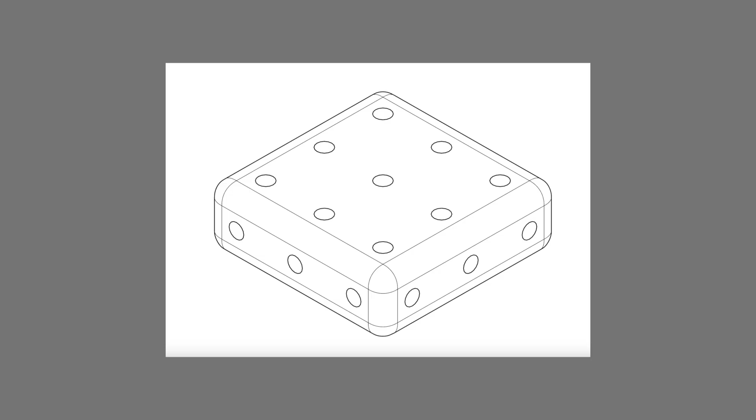The Tinker Block has 9 holes that go all the way through, with 12 holes around the perimeter, only a half inch deep. Once we get logged in, we then will see something like this.

The Create button has a drop-down. Click on the Create button and then select Document. The document dialog then appears.

We enter into the dialog the name of our project, which is Tinker Block 3x3. Click Create and the work area appears.

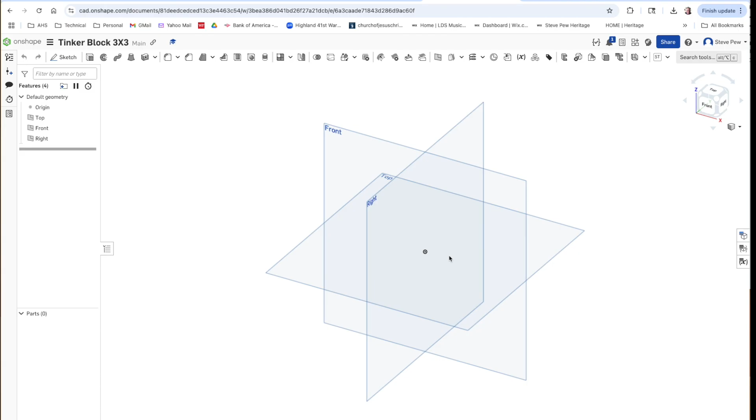Since the top plane is the only one we will be working on, we can hide both the right and the front planes. To view our work area in a straight-on view, we use the right-click menu and select View Normal To. Then we start our sketch.

Click on the top plane to select it, and then we add a rectangle as the first step in creating our Tinker Block. The rectangle we're going to select is the center point rectangle.

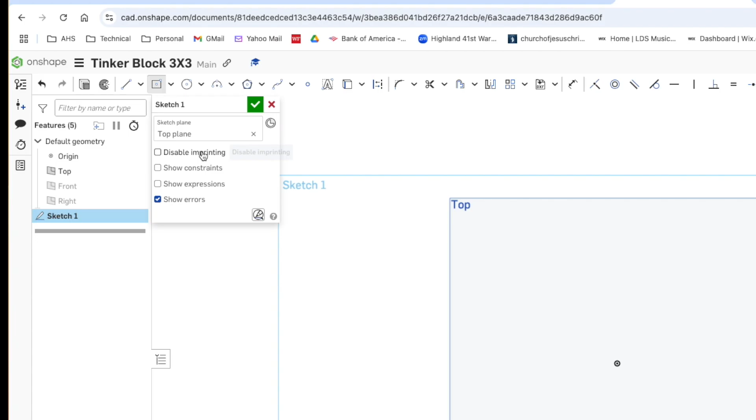We go to the center of the plane and pull a rectangle. What size does this rectangle need to be? Well, from the diagram, it appears that it needs to be 3 inches by 3 inches.

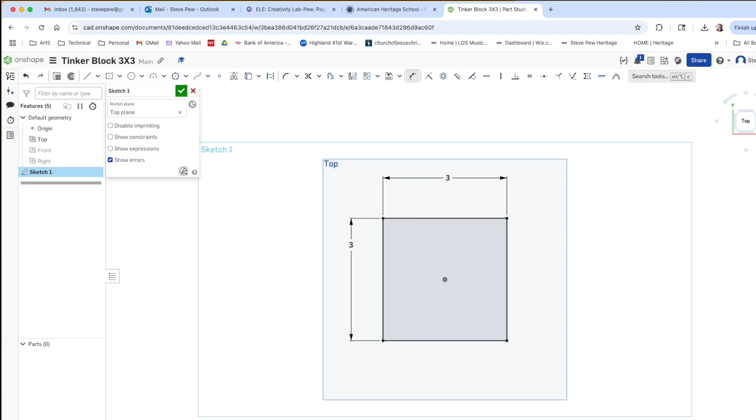So we'll select the Dimension tool, click on the side, drag outward, and then enter 3. Click on the top, drag out, and enter 3 again. Now we have our 3x3 rectangle, and we can close that sketch.

Next, we need to give our rectangle some thickness, so we use the Extrude tool. We click on Extrude, and then we have to say what surface we want to extrude. So we click on the rectangle. It's picked it up as the face of sketch 1.

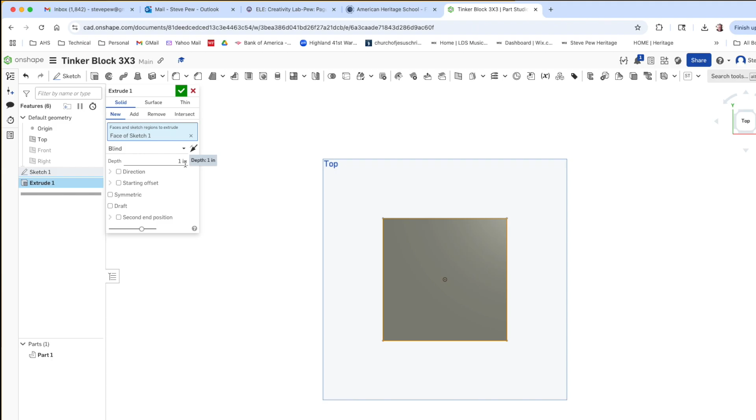We also need to enter the depth of the extrude. From the diagram, it appears that it is 1 inch. We enter 1 inch and check the green box. We have created our extrude.

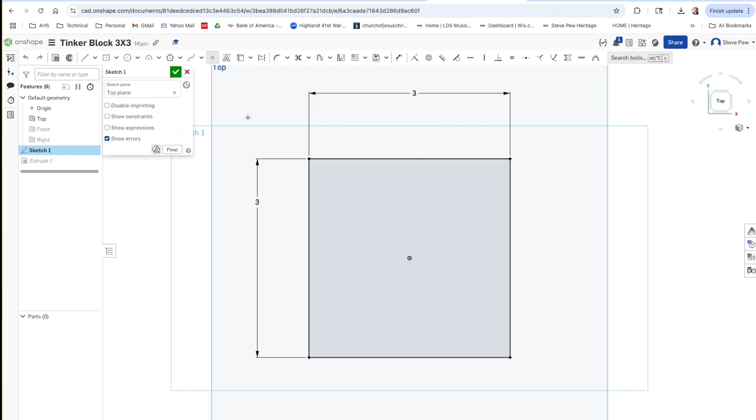We then use View Normal To prepare for our next step. We're going to bring up our first sketch and add some things to it. In fact, we're going to place the points that will represent where we're going to put each hole in our Tinker Block. To do so, we will need to know exactly where to put them.

Looks like a half inch, followed by an inch, followed by an inch, followed by a half inch, and going side to side, a similar set of numbers: half inch, 1 inch, 1 inch, and half inch again. We'll use the Dimension tool to place our points exactly where they belong, a half inch from the top and a half inch from the side.

We'll then get another point. We'll place this point 1 inch below the first point and a half inch from the left side. Notice the little yellow lines that appear. These help us by saying exactly what is in line with the center point and in line with our first point. Therefore, we get exactly a half inch from the left and an inch from the center point.

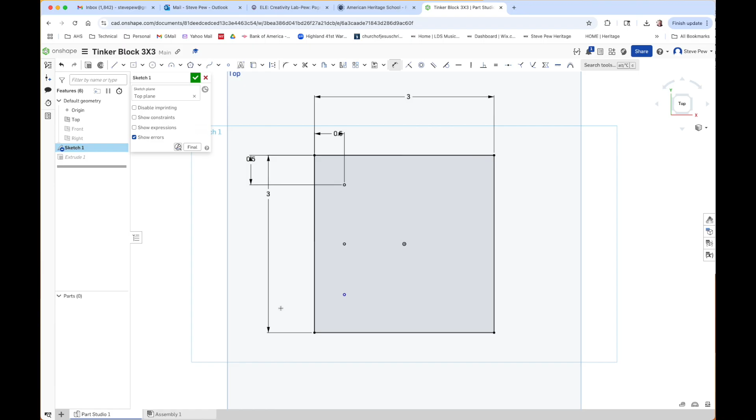Now we need a third point. This third point we can keep vertically correct, but we will also have to set it the correct distance from the bottom. Again, a half inch.

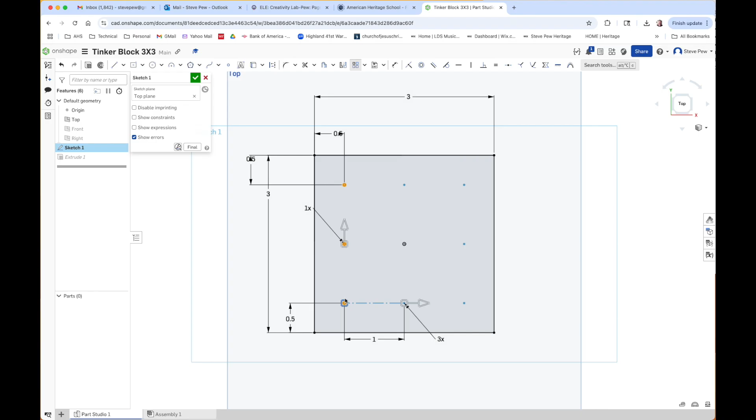With those 3 points set in place, we can then use this special tool, the Linear Pattern tool. We select those 3 points, and the Linear Pattern tool duplicates those 3 points along a horizontal line. Click the mouse button to accept it, and check the green box.

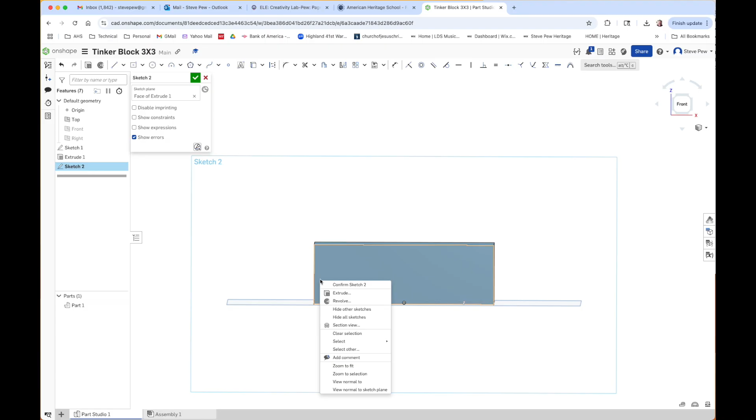We'll need a new sketch to begin placing the points around the perimeter of our block. We choose a side and select it as the plane for sketch 2. We can then go through a similar process that we did earlier. We again select a point and put it on our sketch.

Onshape helps us find the vertical center point. To verify that we have the right location, let's use the Dimension tool and recheck where we've put our point. Looks good. Now let's also place our point exactly 1/2 inch from the left side.

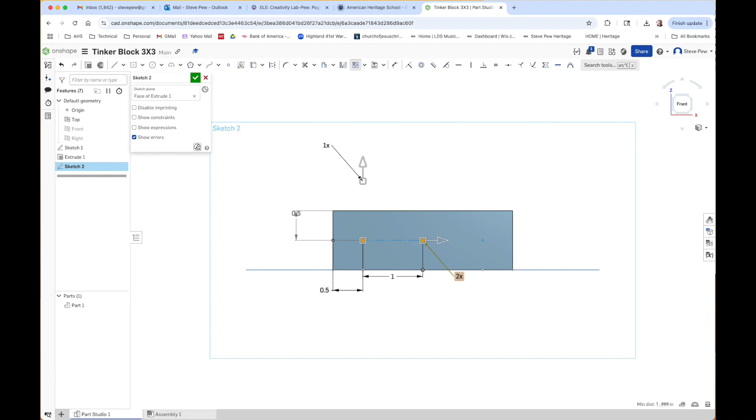Using the Onshape Helper feature, we can find the point that is 1 inch from our first point and exactly 1/2 inch up from the bottom. With these 2 points in place, we can again use the linear pattern feature, but this time we only need to add 2 dots from the left, so we change the 3 to a 2, and we have completed the work on this side.

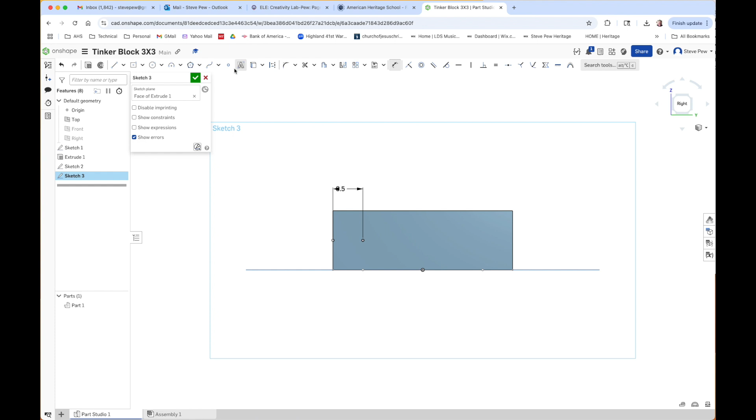We still have 3 sides, so we have to do 3 additional sketches, one for each plane where we will be adding points. We begin the process exactly like we did before. We select a point, use the linear pattern tool, and move through each side doing the same steps.

As we finish our last of the 4 sides, we're then ready to move on to do the actual holes.

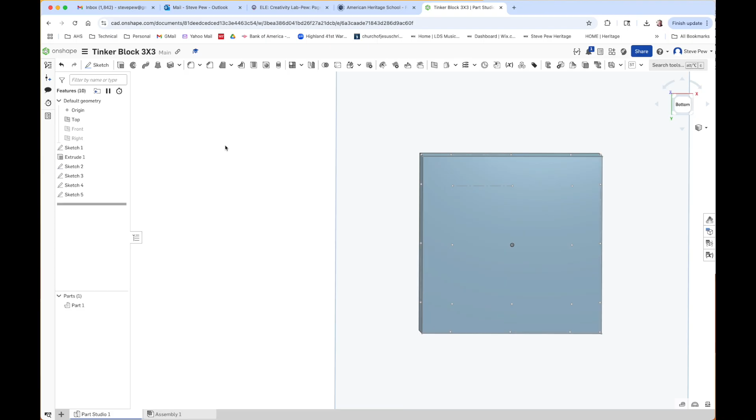We use the hole tool to put the holes in exactly the places where we put the points. We set the size of the hole at 1/4 inch, 0.25, and the depth of the hole—in this case we want them to go all the way through. The thickness of our block is 1 inch, so we set it to 1 inch.

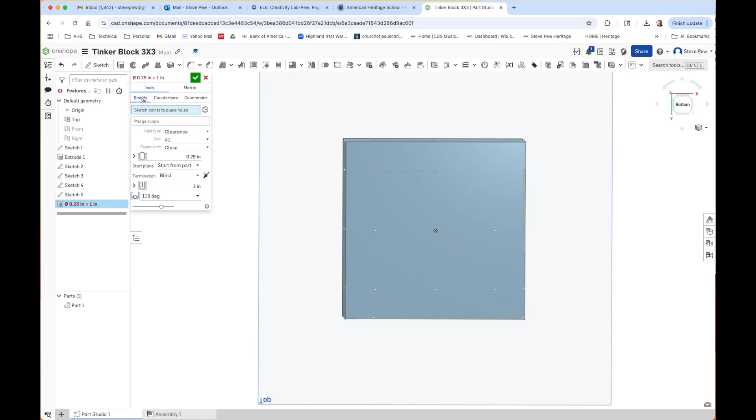We then click on each point, and each point becomes a hole. We walk through the entire 9 holes and see how they're added to the dialog. This means they could be individually changed, removed, or we can continue to add.

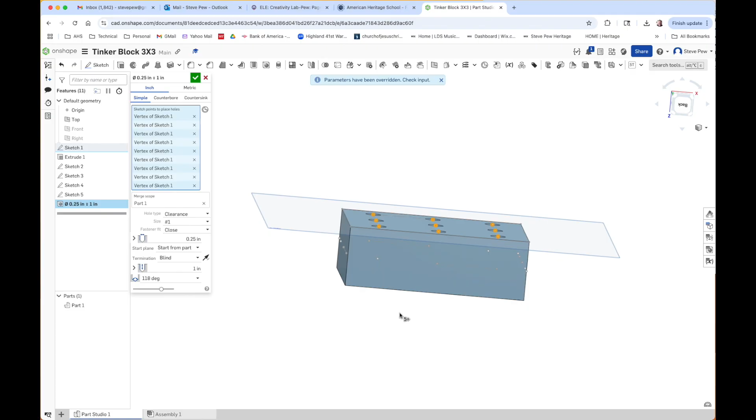Because the holes on the side faces are not going to go all the way through and are going to be set at 1/2 inch, we bring up the hole tool again and do a different set of holes. The perimeter holes, again, are still 1/4 inch, and they are 1/2 inch deep.

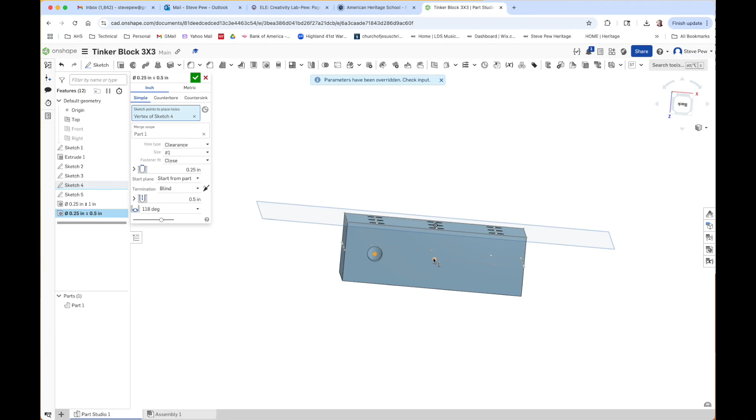Notice as these are being placed that we do not need to remain on the same face. We are simply placing these based on where points exist, rather than on a specific face. Therefore, we can turn our block, click on some more of the points, and eventually set all 12 of these perimeter points using the same hole tool dialog.

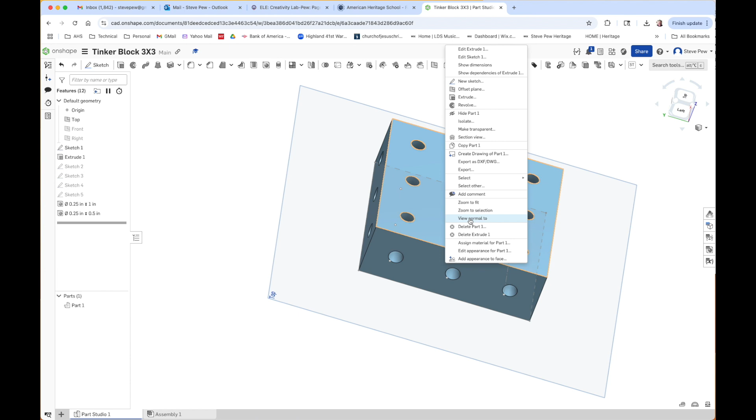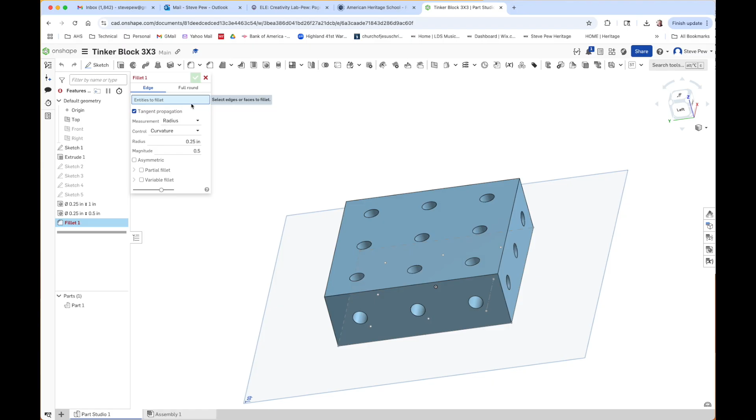Therefore, each corner that we select will become a 1/4 inch fillet. Even the sides, the short corners, the long corners—it doesn't matter, and they can all be done on the same dialog. With that, our design is finished.

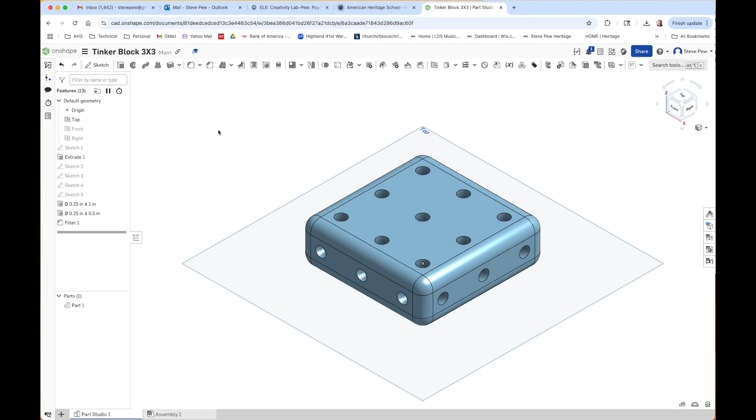We are prepared to create a drawing or export a file that can be sliced in preparation to do 3D printing. Name your file, make sure it's output as an STL file, that it's going to go to your downloads directory, and export. With that, you are ready to do 3D printing.